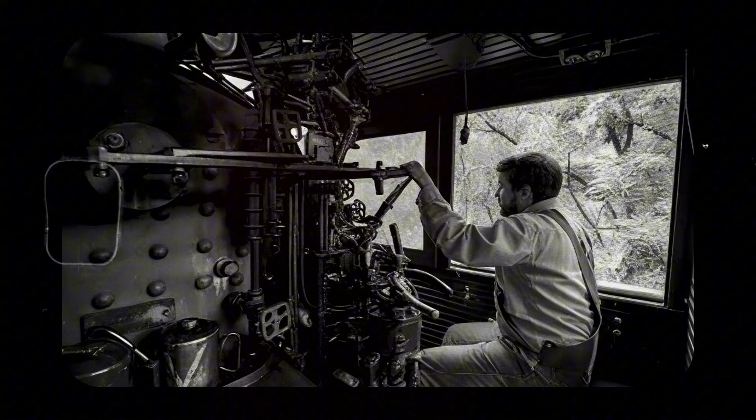Running through tunnels in the 1850s meant holding your breath and hoping for the best. Locomotives belched massive clouds of coal smoke and carbon monoxide directly into confined spaces with zero ventilation. Crews had no masks, no breathing apparatus, nothing between their lungs and the toxic exhaust billowing from their own smokestack. The physics were brutally simple: a locomotive entering a tunnel pushed its own smoke ahead like a piston, then sat in that poisonous cloud for however long the tunnel stretched. Engineers and firemen would emerge gasping, eyes streaming, sometimes unconscious at the controls.

Tunnel workers clearing debris fared even worse. Maintenance crews routinely collapsed from the fumes while repairing tracks underground. The Baltimore and Ohio's tunnels became particularly notorious. Crews called certain runs suicide shifts because the smoke concentration could render a man unconscious in minutes.

Some railroads experimented with timing train passages to allow smoke clearance between runs. Most didn't bother. The solution seemed obvious: improve ventilation or modify exhaust routing, but that cost money. So engineers kept running blind into smoke-filled darkness, gambling they'd reach the other side before the carbon monoxide won.

Locomotives in the 1850s routinely barreled through pitch darkness with lighting that wouldn't illuminate a decent-sized closet. Early headlights were little more than oil lanterns mounted on the smokebox, casting perhaps 50 feet of dim yellow glow. At 30 miles per hour, that gave engineers roughly 1 second of warning before hitting whatever lurked on the tracks ahead. Stopping distances far exceeded visibility distances. Engineers couldn't see obstacles until they were already committed to colliding with them.

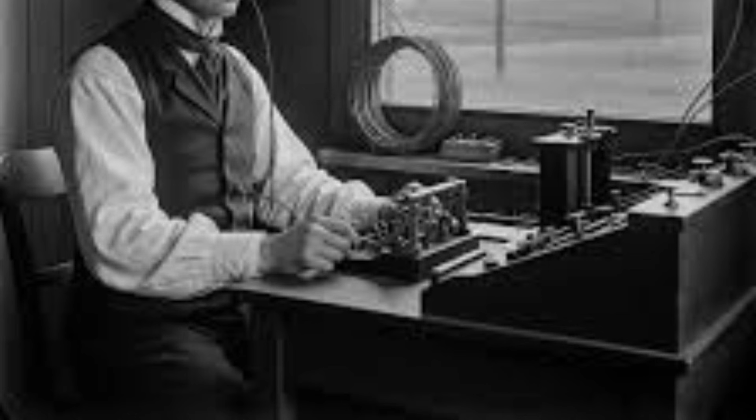Station operators worked long shifts in noisy environments, copying messages under pressure while multiple trains waited. Penmanship varied wildly. An engineer squinting at scrawled instructions in poor lighting might misread a crucial detail: the wrong track number, an incorrect time, a misspelled station name. The system had no verification protocols. Once an order left the dispatcher's key, it traveled through multiple human hands with no confirmation that the final version matched the original intent.

A famous collision near Burlington in 1855 killed 21 people when conflicting orders sent 2 trains toward each other on the same track. Investigators found the telegraph message had been transcribed correctly, but one operator interpreted the timing differently than intended. The technology that promised safety had simply relocated the danger.

Engineers and firemen in the 1850s worked until they couldn't physically continue, then worked some more. 18-hour shifts were common. 24-hour marathons weren't unusual during busy periods. Railroads treated crew fatigue as a personal failing rather than a systemic hazard. The consequences were predictable.

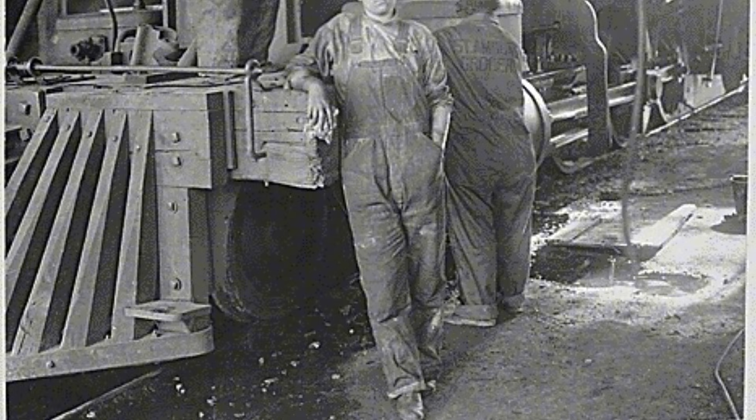Exhausted engineers fell asleep at the throttle, missing signals and station stops. Firemen nodded off while monitoring water levels, allowing boilers to run dangerously low. Brakemen stumbling across car roofs in the dark made fatal missteps because their reflexes had abandoned them hours earlier.

Management's attitude was brutally pragmatic. Training replacement crews cost money. Running existing crews into the ground cost nothing on paper. When accidents occurred, companies blamed individual negligence rather than examining scheduling practices.

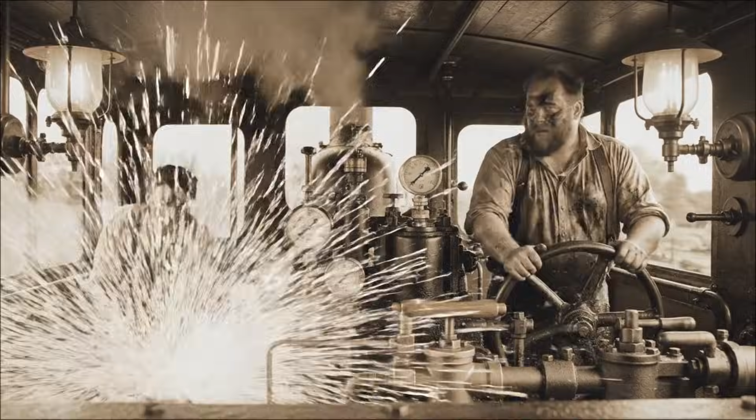Some engineers reported working 72 hours straight during peak traffic, sustained by coffee and desperation. Medical understanding of fatigue's effects on judgment barely existed. The concept that sleep deprivation could impair performance as severely as intoxication wouldn't gain acceptance for another century. Meanwhile, engineers operated complex machinery while barely conscious.

Every railroad in the 1850s invented its own rules, its own signals, and its own procedures.

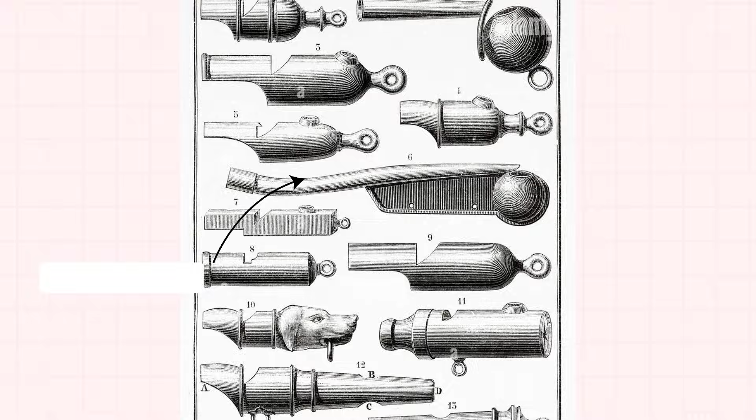An engineer who worked perfectly safely on one line became a liability the moment he crossed onto another railroad's tracks. Hand signals meant different things to different companies. Whistle codes varied wildly—what indicated stop on the Pennsylvania might mean proceed with caution on the Baltimore and Ohio.

This chaos extended to basic operations. Some railroads gave eastbound trains priority, others favored westbound. Some used red flags for danger, others used white.

Even within single companies, rules changed between divisions. A conductor who knew the Northern Division's procedures might find himself completely disoriented on the Southern Division. The resulting confusion caused countless collisions and derailments. Experienced railroaders carried mental libraries of contradictory rules, trying to remember which procedures applied to which stretch of track.

Industry standardization wouldn't arrive until decades later, driven by accumulated disasters that finally convinced competing railroads that dead passengers were bad for everyone's business. Railroad expansion in the 1850s outpaced engineering wisdom.

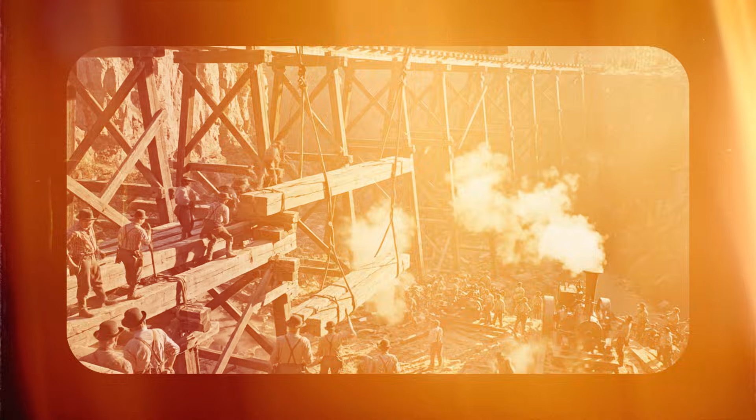When tracks needed to cross valleys, rivers, or ravines, builders threw up wooden trestle bridges with terrifying speed. These structures used timber framing that could be erected in weeks rather than the months required for stone or iron construction. The cost savings were substantial.

So were the risks. Wooden trestles rotted from within, their decay invisible until catastrophic failure. Heavy rains swelled rivers that undermined foundations. Fire from locomotive sparks could destroy an entire bridge in minutes. Maintenance inspection was haphazard at best. Many railroads considered bridges sound until they actually collapsed.

But structural collapses were equally common. Timber that looked solid might be hollowed by rot or weakened by insect damage. Engineers crossing trestles learned to listen for unusual sounds, creaking or cracking that might signal imminent collapse. They also learned to accelerate, reasoning that getting across quickly reduced exposure time to whatever might happen beneath the wheels.

In the 1850s, trains followed each other with nothing but faith and scheduling between them. The block signal system, which divided tracks into protected sections, existed in theory but rarely in practice. Most American railroads relied entirely on timetables, assuming trains would maintain their schedules with clockwork precision.

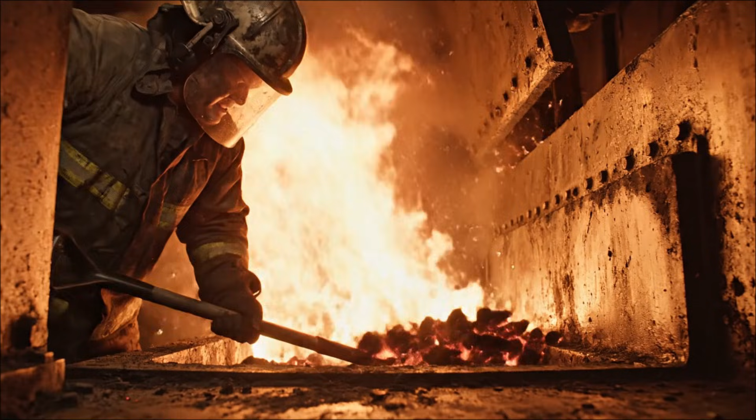These blowbacks happened without warning. One moment a fireman would be reaching toward the firebox with his shovel. The next, he'd be engulfed in flames and steam, hot enough to cook flesh instantly. Survivors described the sensation as being hit by an invisible wall of fire.

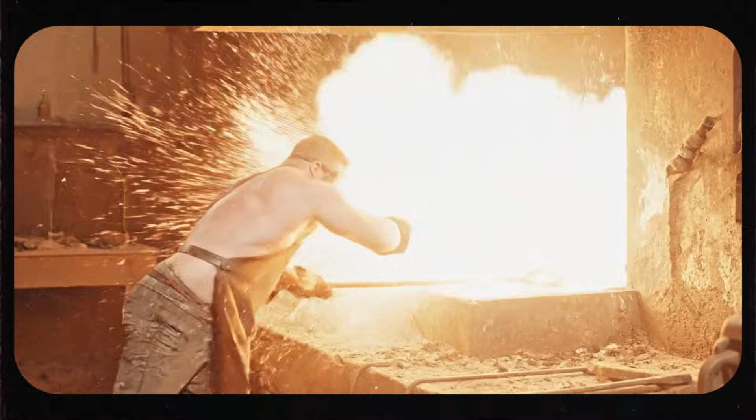The cab offered no protection. Early locomotives had minimal shielding between crew and machinery. Firemen worked inches from the firebox opening, fully exposed to whatever came out. Burns were an occupational expectation rather than an exception.

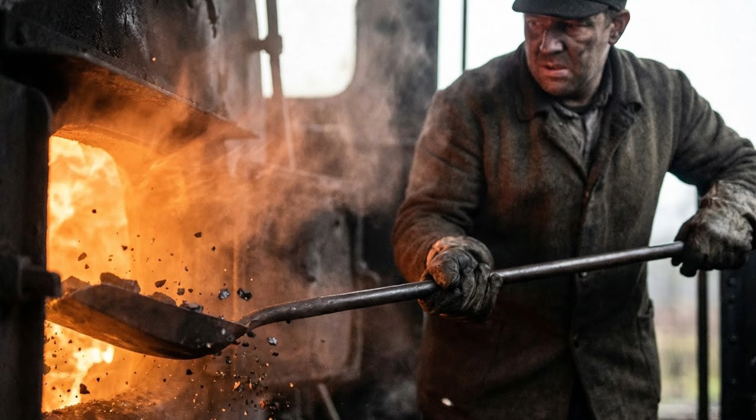Experienced firemen developed techniques to minimize exposure, angling their bodies, using long-handled shovels, timing their actions to the locomotive's rhythm. None of this was foolproof. The fundamental design placed human beings directly in the path of potential thermal eruptions, and nobody seriously considered redesigning it.

Locomotive cabs in the 1850s offered crews about as much protection as a covered wagon. Many early designs had no enclosed cab at all, just a small roof over the engineer and fireman's positions. Side walls, when they existed, were often partial, leaving crews exposed to wind, rain, snow, and flying debris.

Operating in winter meant enduring temperatures that could freeze exposed skin in minutes. Engineers and firemen bundled in layers of wool, their hands barely functional inside heavy gloves that made operating controls difficult. Frostbite was routine. Hypothermia was a genuine risk on long runs through mountain passes.

Summer brought different torments. Crews roasted between the firebox heat behind them and direct sun above. Cinders and hot ash from the smokestack rained down constantly. Burns from flying embers were so common that railroad crews developed distinctive scarring patterns.

The cab's exposure also meant vulnerability to trackside hazards. Tree branches, low bridges, and debris struck crews with regularity. Engineers learned to duck instinctively at certain locations, knowledge passed down through painful experience. Full cab enclosures would come eventually, but the human crew remained the least protected component.

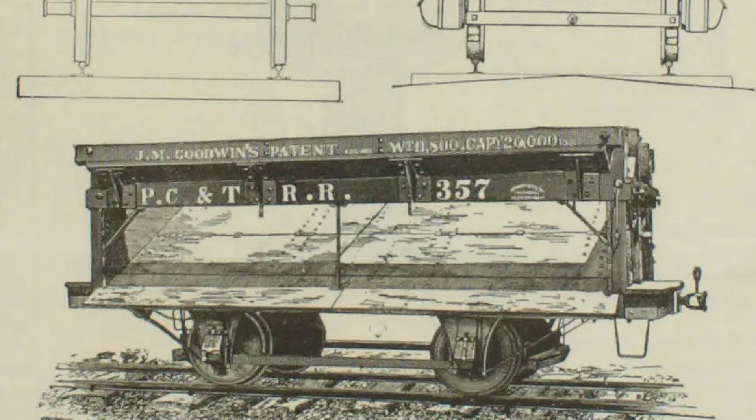Wooden cars were cheap to build. Metal alternatives existed but cost more. Railroads calculated that the occasional fire death was an acceptable price for lower construction expenses. Insurance would cover lawsuits. Passengers sat in elaborately decorated fire traps, their ornate woodwork soaked in varnish that accelerated flames beautifully. Heating alternatives were proposed, but rarely implemented.

The Angola horror of 1867 would eventually force change, when 49 people burned alive after a derailment sent stove coals throughout the wreckage. But throughout the 1850s, the danger remained theoretical enough for railroads to ignore.

Engineers knew their passengers rode in kindling boxes. They also knew that expressing such concerns publicly would cost them their jobs. The business of railroading prioritized economy over safety.

Iron rails in the 1850s had a fatal flaw that winter exposed with brutal regularity. The metal became brittle in cold weather, snapping under the weight of passing locomotives with no warning whatsoever. An engineer would be running along perfectly sound track when suddenly his wheels would drop into a gap where moments earlier solid rail had existed.

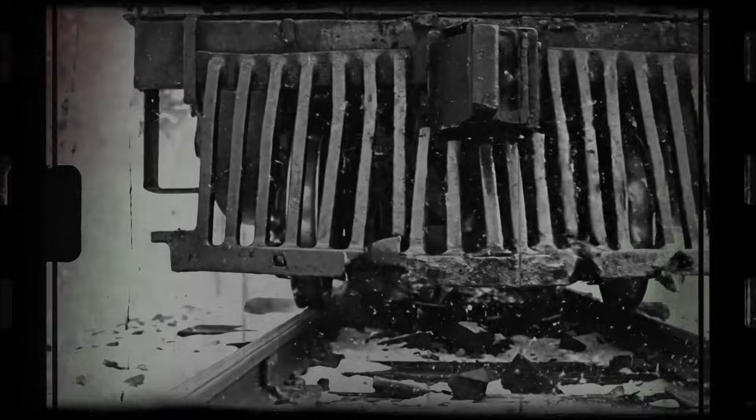Temperature swings made the problem considerably worse. Rails contracted in freezing weather, opening dangerous gaps at joints. The same rails that seemed perfectly secure on a mild afternoon might fracture catastrophically on a frigid morning. Engineers learned to dread the sharp crack of breaking rail, a sound that meant instant disaster.

There was no time to react, no chance to stop. By the time you heard the snap, you were already derailing.

The solution was steel rail, which resisted cold weather brittleness far better than iron. But steel cost significantly more to manufacture, and most railroads refused to invest until the accident toll became impossible to ignore. Throughout the 1850s, trains continued running on iron rails that might shatter at any moment, their engineers gambling that this particular cold morning wouldn't be the one where the metal gave way.

Most American railroads in the 1850s operated on single track, with trains running both directions on the same rails. The system depended entirely on scheduling. Eastbound and westbound trains were supposed to meet at designated passing sidings, where one would wait while the other proceeded. When the system worked, it worked elegantly. When it failed, trains met head-on at combined speeds approaching 60 miles per hour.

The failures happened constantly. A delayed train might miss its scheduled meet. A conductor might misread his orders. A station operator might forget to display the proper signals.

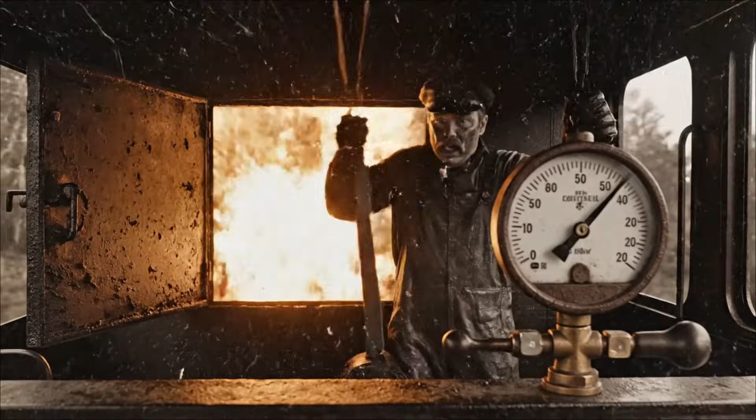Engineers learned to watch for telltale smoke ahead, the only warning that another train occupied their track. Even then, stopping was usually impossible. The physics of momentum guaranteed that by the time you saw the other locomotive, you were already committed to collision.

Some engineers survived by jumping clear at the last possible moment. Many didn't have time. Head-on collisions became so common that railroad men developed a grim fatalism about the odds.

Brakemen in the 1850s earned their wages walking across the roofs of moving freight cars. Before air brakes existed, stopping a train required manually turning brake wheels on individual cars. When the engineer whistled for brakes, brakemen scrambled up ladders and ran across car roofs, spinning wheels as they went.

The job was dangerous in perfect conditions, and suicidal in anything else. Rain made rooftops slick as ice. Snow obscured the gaps between cars. Darkness turned the journey into pure guesswork. Wind could knock a man off balance at the worst possible moment. Tunnels and low bridges added another dimension of terror.

A brakeman focused on his brake wheel might not notice the overhead clearance approaching until it was too late. Railroad veterans spoke of colleagues who simply vanished during tunnel passages, swept off by structures they never saw coming. The mortality rate among brakemen was absolutely staggering. Some estimates suggest that 1 in 4 brakemen would die or be seriously maimed during their railroad career.

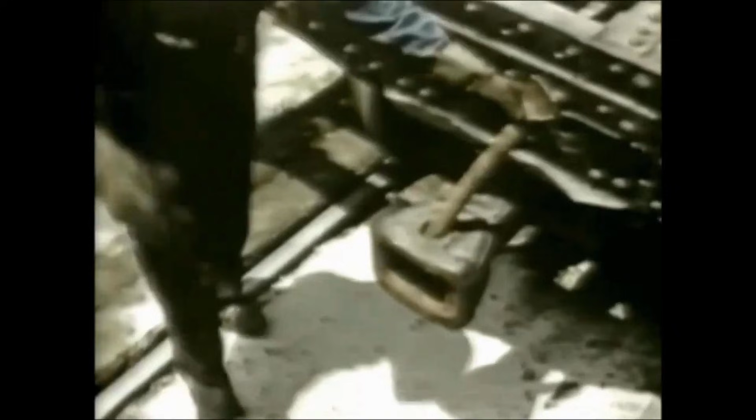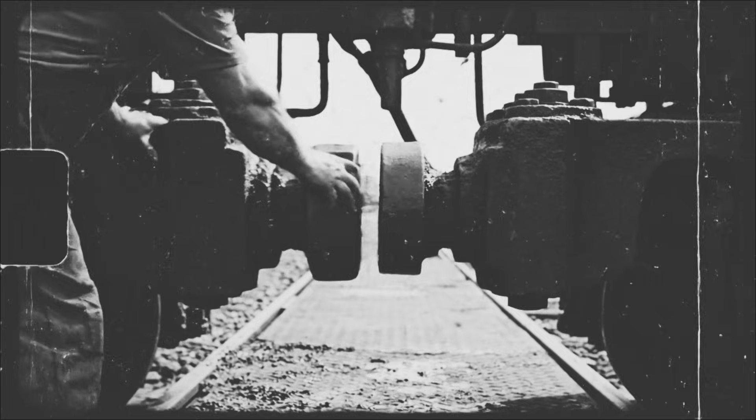The job attracted young men who needed money badly enough to accept those terrible odds, and it killed them with mechanical efficiency. Coupling railroad cars in the 1850s required a man to stand between two moving vehicles and guide a heavy iron link into a socket, then drop a pin to secure it. The timing had to be perfect. The cars approached each other at walking speed, their massive weight building unstoppable momentum. The coupler had seconds to position the link, drop the pin, and get clear before the gap closed. Get it wrong, and thousands of pounds of rolling iron would crush whatever stood between the couplers.

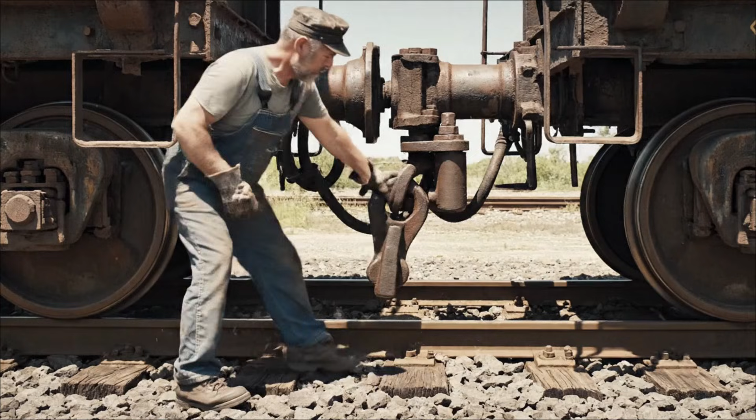The injuries were characteristic and horrific: crushed hands, severed fingers, mangled arms, death from being caught between cars that didn't stop when they should have. Experienced couplers developed techniques to minimize risk, standing sideways, using their bodies as wedges, timing their movements precisely to each car's momentum. None of this made the job safe. It just made survival slightly more probable.

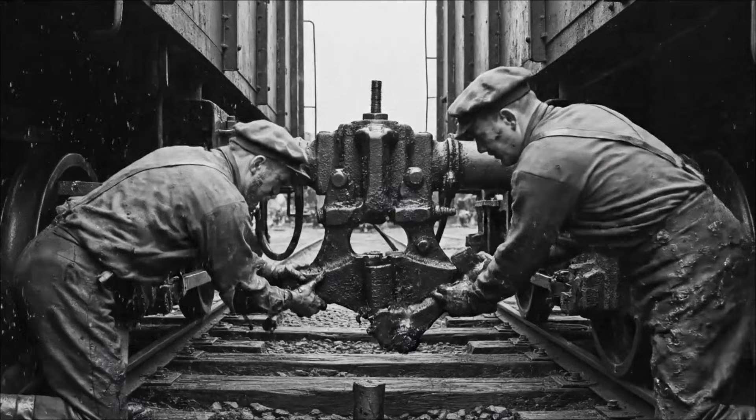Railroads knew the link and pin system was killing their workers regularly. Safer automatic couplers existed by the 1870s, but conversion cost money, and brakemen were cheap and replaceable.

Building railroads in the 1850s meant choosing a track gauge, and everyone chose differently. The Erie Railroad used 6 feet between rails. The Pennsylvania used 4 feet 8.5 inches. Southern railroads often used 5 feet. Some lines used gauges that existed nowhere else.

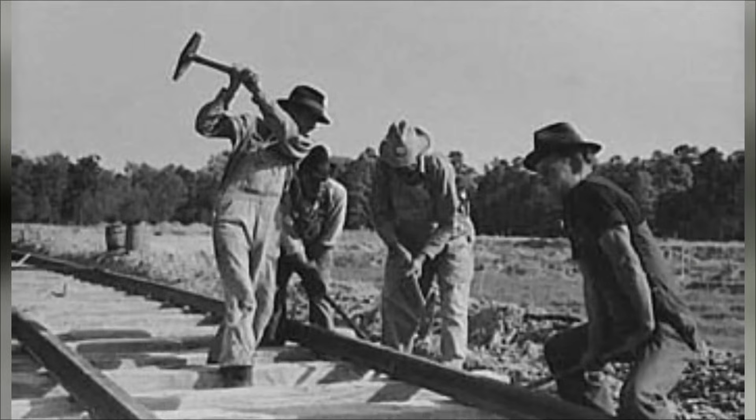The result was chaos at every junction where different railroads met. Freight couldn't simply roll from one line to another. Everything had to be unloaded, transferred to different cars, and reloaded. Passengers walked between trains. Goods sat in warehouses waiting for transshipment. Through traffic was essentially impossible.

The inefficiency was staggering, but the incompatibility also created safety hazards. When tracks of different gauges converged, the resulting track geometry confused even experienced engineers.

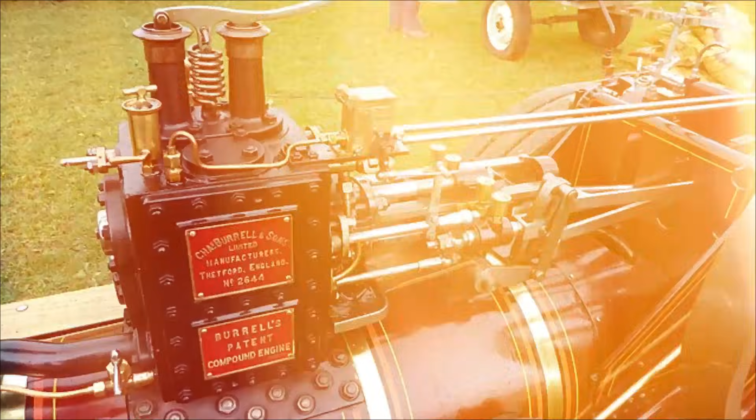The safety valve was supposed to be the last line of defense against boiler explosion. When pressure exceeded safe limits, the valve would open automatically, releasing steam and preventing catastrophic disaster. The design was elegant and simple. The implementation was sabotaged constantly by the very crews it was meant to protect.

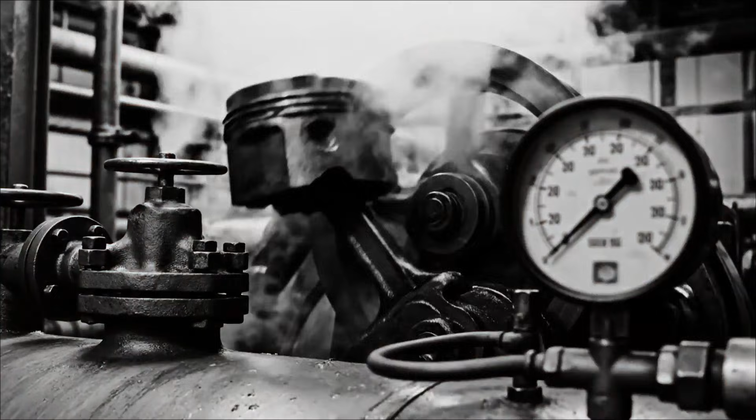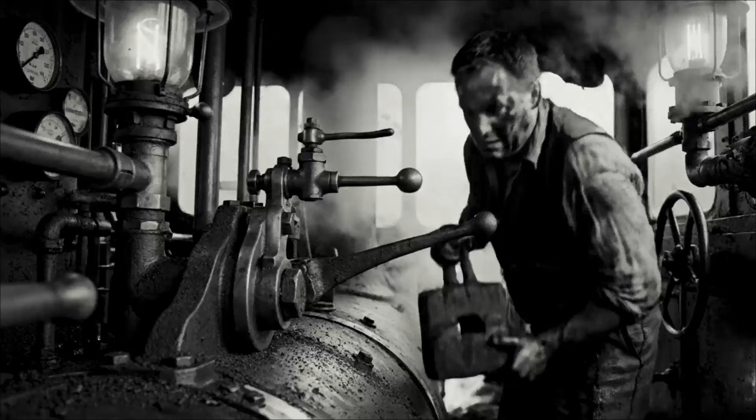Engineers and firemen hated safety valves intensely. Every pound of steam escaping through the valve was pressure that couldn't drive the pistons. A locomotive with a properly functioning safety valve was a locomotive that couldn't achieve maximum power. So crews tampered with them relentlessly.

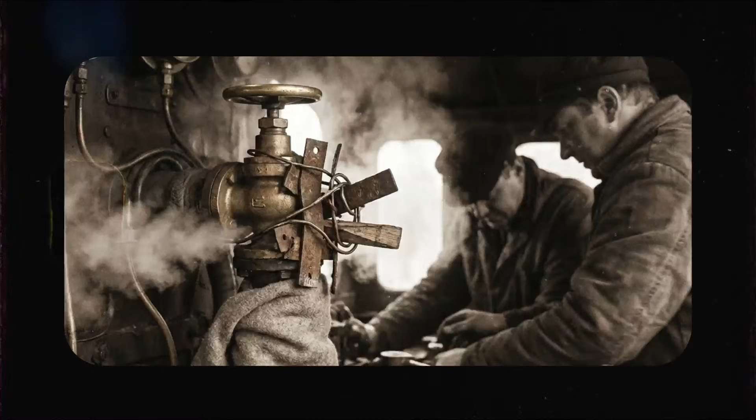They weighted the valves with extra metal. They tightened springs beyond specification. They jammed the mechanisms so valves couldn't open at all. Management often encouraged this behavior indirectly, rewarding engineers who made faster runs without asking how they achieved that extra speed.

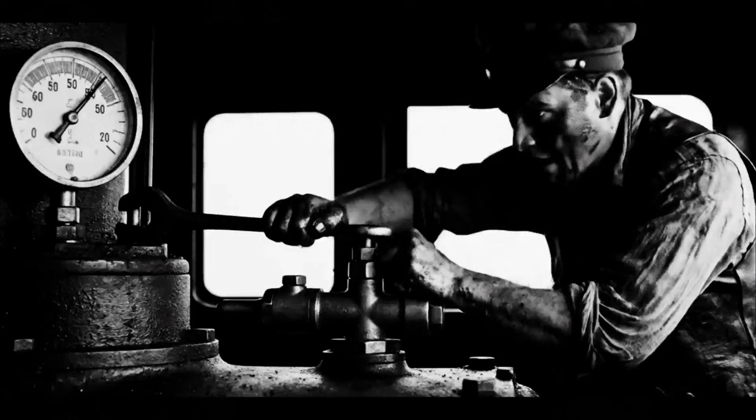The first recorded locomotive boiler explosion in America happened in 1831, when a fireman, annoyed by the hissing of the safety valve, sat on it to keep it quiet. The boiler exploded moments later. Throughout the 1850s, valve tampering remained common practice.

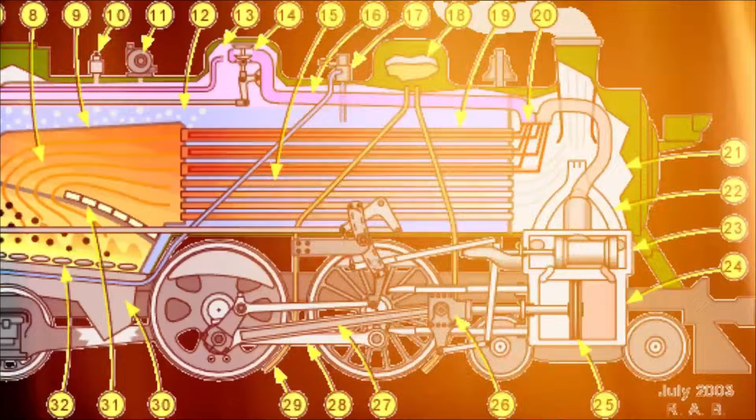The crown sheet was the metal plate forming the top of a locomotive's firebox, the barrier between water in the boiler and fire below. As long as water covered the crown sheet, it stayed cool enough to maintain structural integrity. Let the water level drop, and the exposed metal would overheat rapidly, losing strength until it couldn't contain the immense pressure above. The failure was catastrophic and unsurvivable.

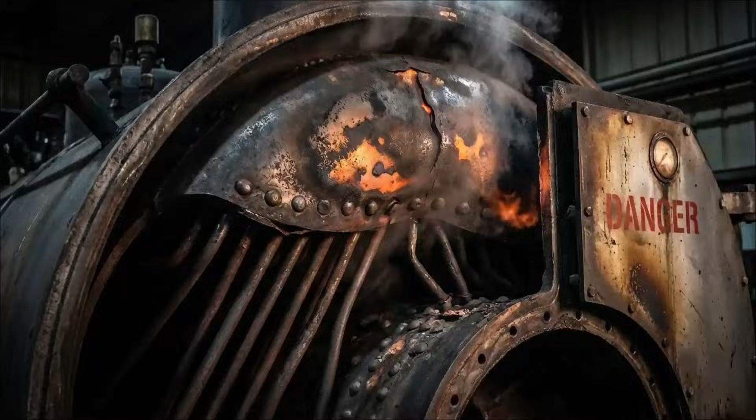Superheated steam would blast downward through the ruptured crown sheet into the firebox, then explode outward through the cab. Crews caught in a crown sheet failure were essentially cooked alive by steam and scalding water. The violence of the release often hurled bodies and locomotive components hundreds of feet from the track.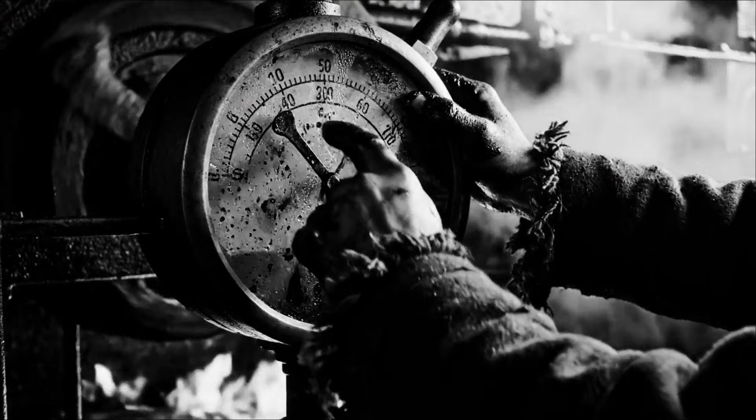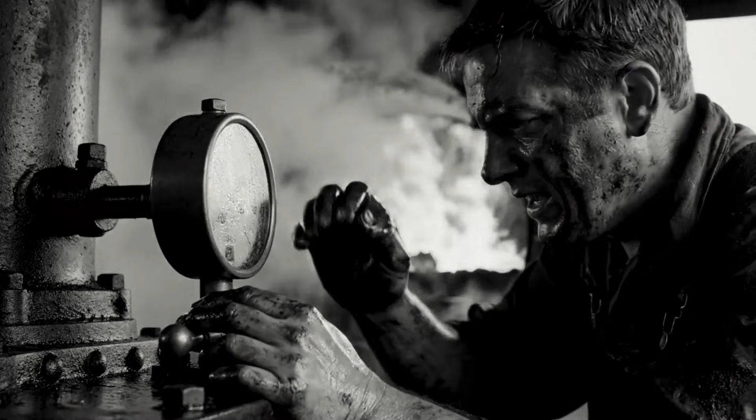Preventing crown sheet failures required constant attention to water levels. But water gauges were crude, often inaccurate, and difficult to read in the dim, vibrating cab. Climbing grades would shift water toward the rear of the boiler, exposing the front of the crown sheet even when gauges showed adequate levels. Exhausted firemen might misjudge their readings. Distracted engineers might not notice the danger until it was too late.

Before telegraph dispatching became widespread, American railroads operated on nothing but printed timetables and faith. Each train had scheduled times for departing stations, arriving at junctions, and meeting opposing traffic at designated sidings. The system assumed every train would run exactly on schedule, every crew would follow their orders precisely, and nothing unexpected would ever happen. Reality was considerably messier than any timetable could accommodate.

Locomotives broke down, weather delayed departures, crews misread their schedules. A train running late might find itself on a collision course with opposing traffic that expected clear track. There was no way to communicate changes once a train left a station.

An engineer running behind schedule had to guess whether opposing trains were waiting at sidings or barreling toward him on the main line. Some railroads gave superior trains absolute priority, forcing inferior trains to wait indefinitely at sidings until the superior train passed. This created cascading delays that rippled through entire systems. One miscalculation could send two trains into the same stretch of single track with no warning.

Nothing in 1850s railroading killed with such sudden violence as a boiler explosion. One moment, a locomotive would be running normally. The next, the boiler would rupture with the force of a bomb, hurling iron shrapnel in every direction, launching the locomotive's shell like a cannon projectile, and scalding everything within reach with superheated steam.

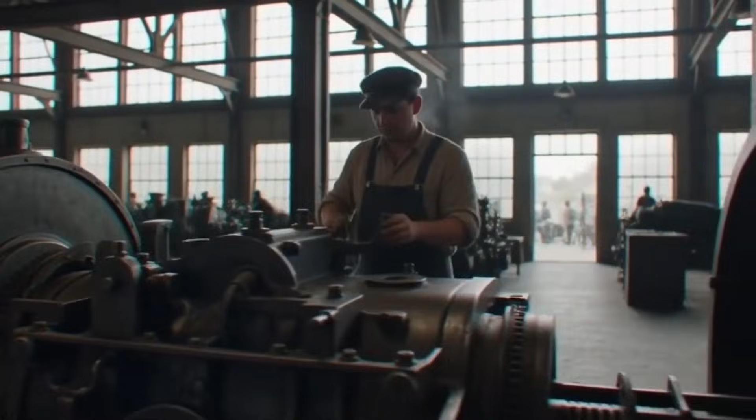Engineers and designers constantly pushed boundaries. Steam would spin a turbine, then drive an electrical generator, and that would power traction motors, for greater efficiency and increased power. But not every experiment succeeded.

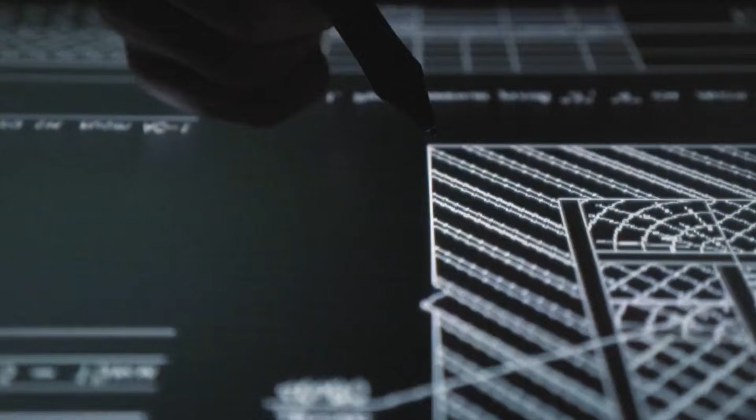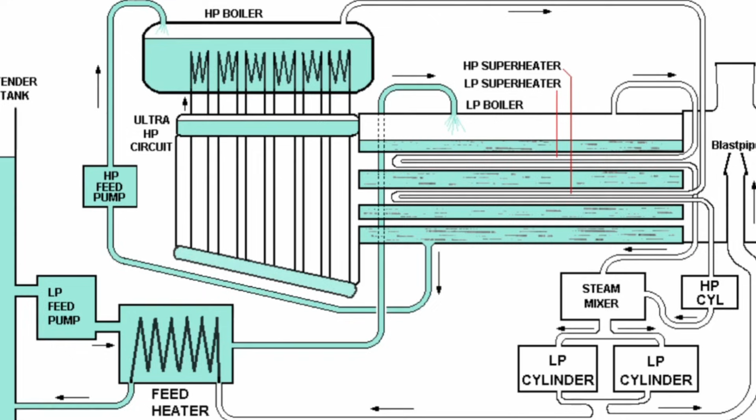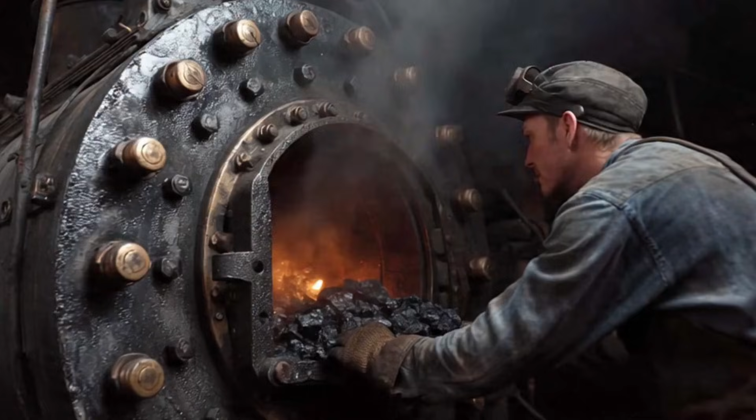The rebuilt machine limped through a handful of tests before being abandoned entirely due to persistent mechanical failures that made it utterly useless for regular service.

Engineers removed the reliable piston engine and installed a steam turbine in its place, leaving everything else completely unchanged. The locomotive still looked like a standard 2-6-2 wheel arrangement, but now it had turbine gearing where pistons once lived. The results were catastrophic. Performance plummeted to levels well below the original piston-driven locomotive.

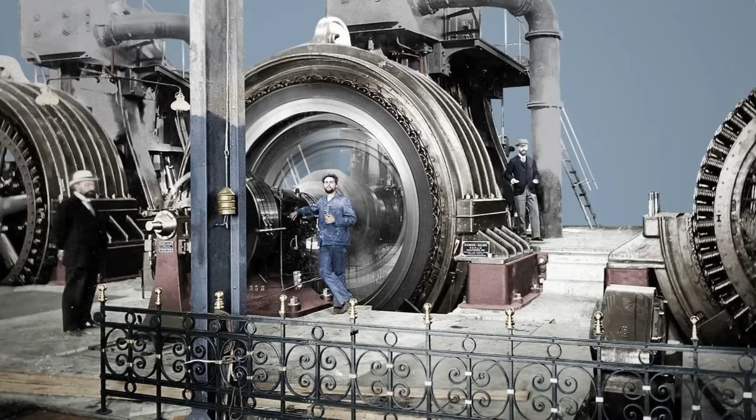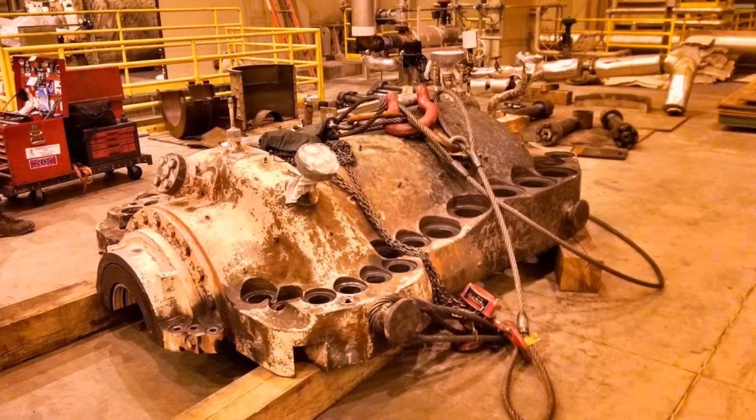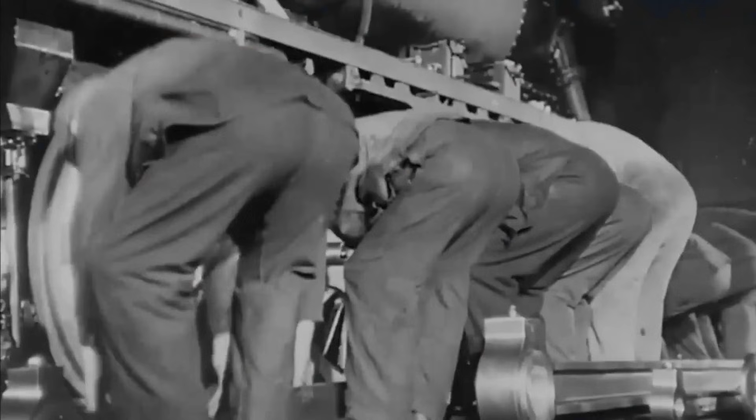They simply refitted the locomotive with a conventional piston engine in 1936 and pretended the whole turbine episode never happened. Italian engineers did not bother rebuilding the experiment. The failed conversion stood as proof that bolting new technology onto old designs rarely ends well.

Number 6. The locomotive was later rebuilt with a conventional boiler and renamed. This incident shocked the railway industry and raised serious questions about the viability of ultra-high-pressure steam technology.

Such pressures were unacceptable. The materials and engineering knowledge of the time were simply insufficient to safely operate boilers at these pressures. Fury was withdrawn from service immediately.

The fireman worked alone on a platform at the rear, completely exposed to weather and separated from the engineer by an entire roaring boiler. The result was a machine that looked unlike any steam locomotive before it.

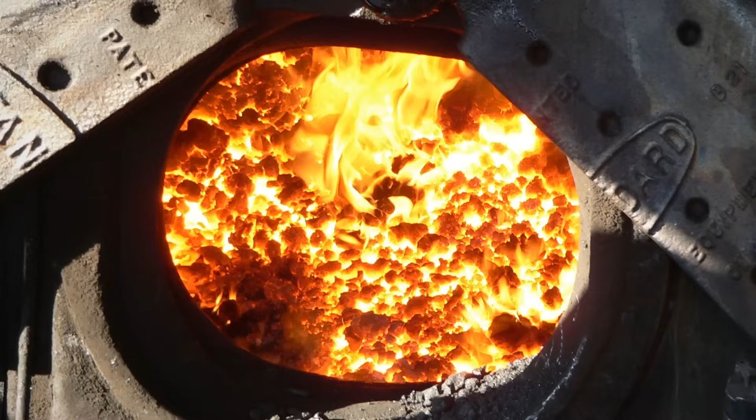Engineers perched directly above the whirling side rods and main rods, with nothing but thin cab walls between them and disaster. This design offered numerous advantages, including better working conditions for crews, reduced turnaround times, and improved visibility.

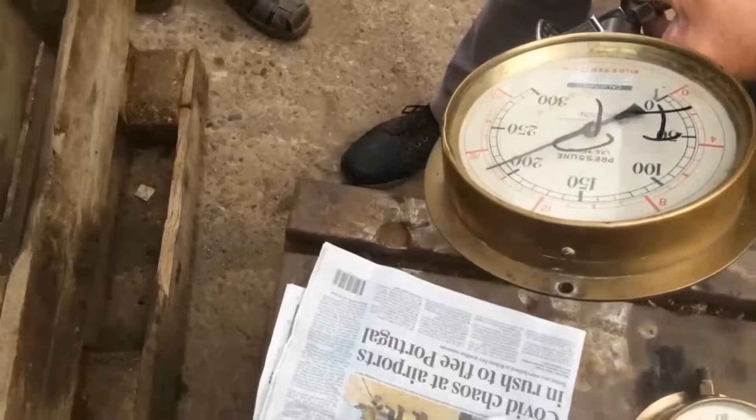Pennsylvania Railroad engineers quietly shelved the proposal, recognizing that ambition had outpaced physics. The Leader featured a completely enclosed design with driving cabs at both ends, eliminating the need to turn the locomotive at the end of each journey.

Water from the condensing system followed the dust, turning coal residue into an abrasive slurry that destroyed electrical components. The locomotives could not complete a single journey from Washington to Cincinnati without suffering some kind of failure.

After spending millions on development, the C&O operated their M1s for barely a year before giving up. Number 5. The Kitson-Still locomotive.

In the 1920s, engineers were exploring ways to combine the best features of steam and internal combustion engines. The complex chain-driven mechanism that transmitted power to the wheels proved troublesome, requiring frequent adjustment and repair. Reliability was poor, with the locomotive spending far more time under repair than in service.

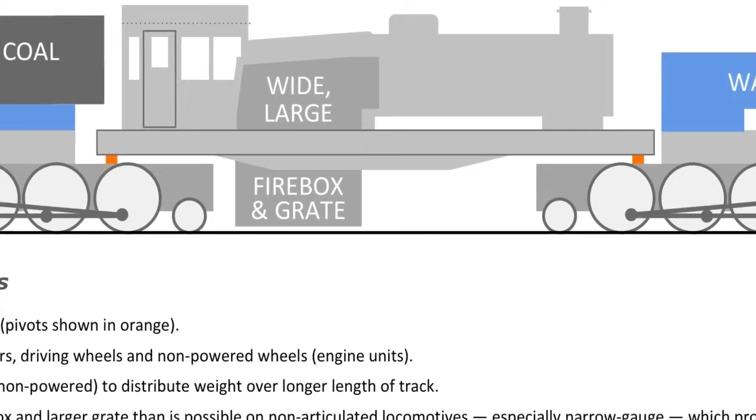The proposed V1 class would have featured 4 complete engine units, essentially quadrupling the triplex concept that had already proven problematic on the Erie and Virginian railroads. Internal documents show engineers planning for over 200,000 lb of tractive effort.

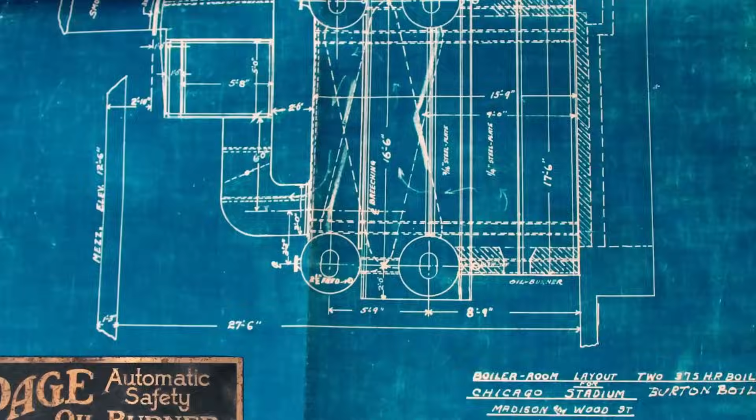The reality proved humiliating. This massive machine could barely sustain 5 miles per hour. The boiler, despite being larger than anything previously attempted, simply could not generate enough steam for 6 enormous cylinders operating simultaneously. Crews watched pressure gauges drop towards zero within moments of opening the throttle.

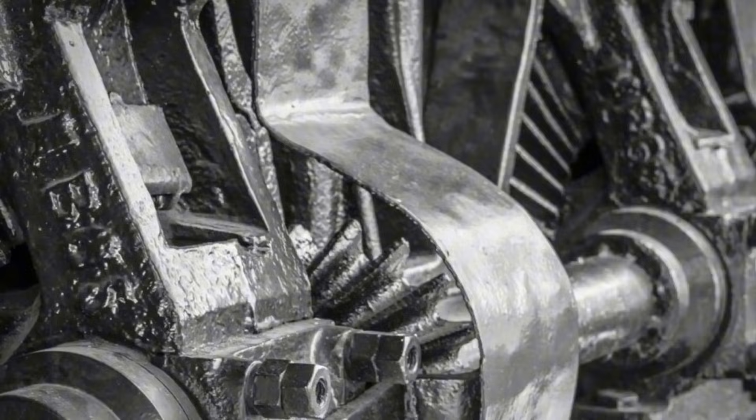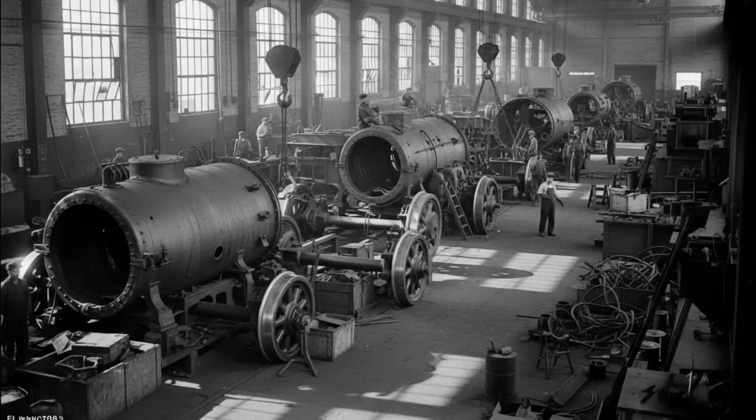After less than 5 years of frustrating service, the Virginian returned the locomotive to Baldwin, who cut it apart and rebuilt it as 2 separate, conventional locomotives.

Baldwin built the first triplex for the Erie Railroad in 1914, naming it the Matt H. Shay, after a beloved company engineer.

The reality proved that some problems cannot be solved by simply adding more cylinders. The Matt H. Shay generated 160,000 pounds of tractive effort, more than any steam locomotive before or since. This massive force immediately created new problems. Couplers snapped, car frames twisted, drawbars pulled out of freight cars like corks from bottles.

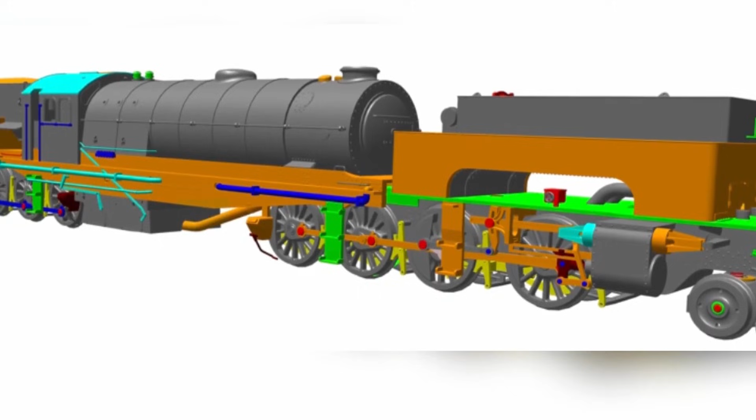The locomotive, delivered in 1925, was a massive articulated machine with separate engine units at each end and the boiler suspended between them. The railway industry concluded that specialized locomotives, whether pure steam or pure diesel, were more practical than attempting to combine both technologies in a single machine.

Number 4: the Beyer-Garratt oil burning experiment for London transport in the 1920s.

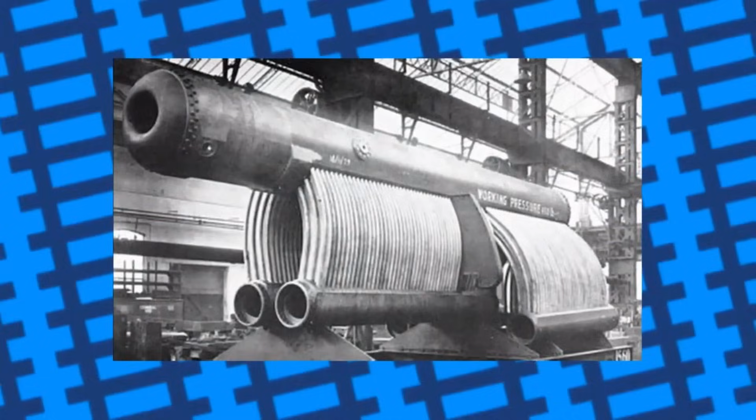But the locomotive's problems proved impossible to hide. Nigel Gresley designed it with a water tube boiler operating at 450 pounds per square inch, more than double the pressure of conventional locomotives. But the original oil-burning configuration never ran again. This experience demonstrated that technological solutions must be matched carefully to operational requirements, and that complexity doesn't always equal improvement.

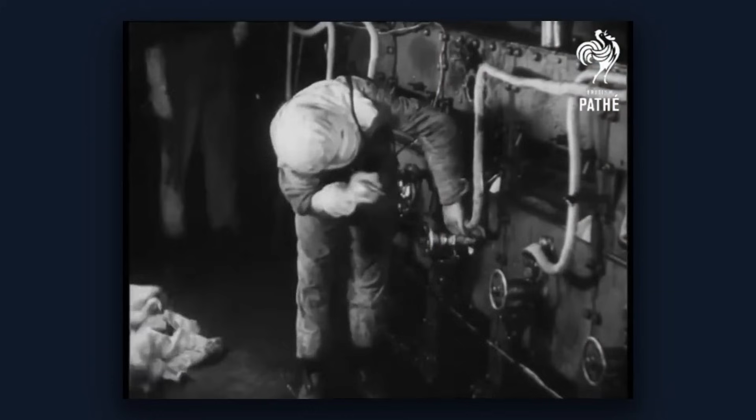Marine engineers had proven high-pressure water tube boilers worked brilliantly in ships, but railway operation proved far less forgiving. Steaming proved so poor that the locomotive could not match the performance of standard Gresley Pacifics despite its advanced technology. The compound expansion system required constant adjustment.

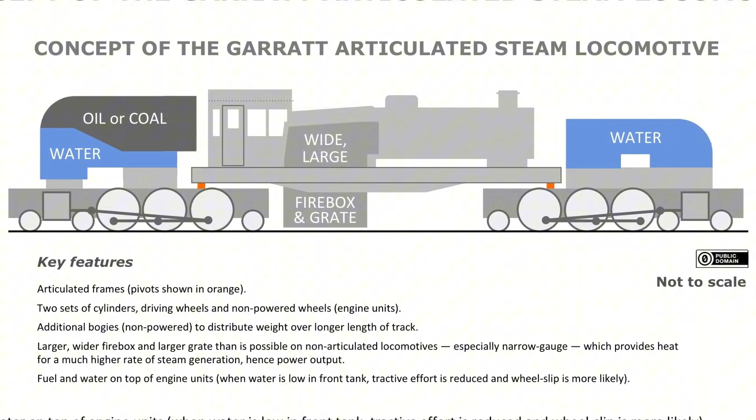The gas turbine engine could produce far more horsepower than contemporary diesel locomotives. The burners were temperamental and difficult to adjust properly. When not perfectly tuned, they produced excessive smoke and soot, defeating the entire purpose of using oil fuel.

London's Metropolitan Railway needed powerful locomotives to haul heavy commuter trains through the increasingly congested underground sections. The railway ordered a specialized Beyer-Garratt articulated locomotive.

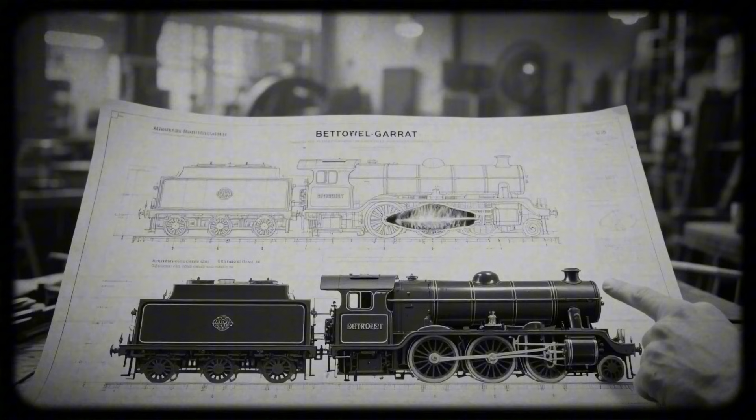Fuel consumption was the most obvious problem. The turbines burned Bunker C fuel oil, a thick, heavy residue left over from petroleum refining. While this fuel was cheap, the turbines consumed it at extraordinary rates.

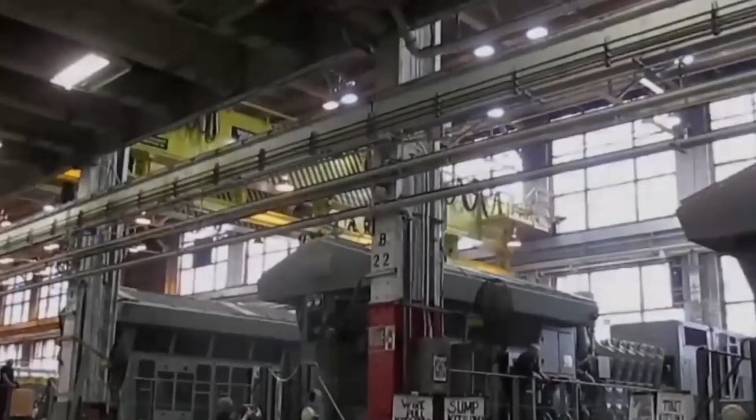After 7 frustrating years, the LNER admitted defeat and rebuilt the entire locomotive with a conventional boiler in 1936. The turbines were sensitive to fuel quality, and contamination could cause rapid deterioration of turbine blades.

Turbines require high rotational speeds to operate efficiently, and gearing that worked beautifully at highway velocities proved catastrophic at yard speeds. Union Pacific eventually developed improved turbine designs that addressed some of these issues, but the earliest experimental units were deemed beyond economical repair. But they also demonstrated the challenges of introducing radically new technology to railway operations. The locomotive was scrapped in 1952, having logged just 103,000 miles before proving turbines belong in power plants, not on rails.

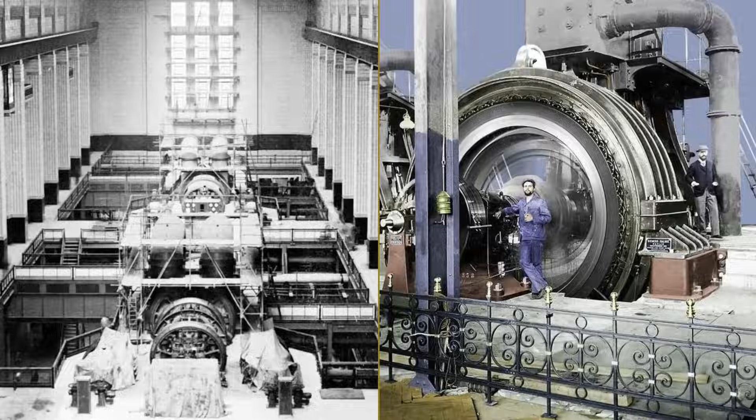Above 40 miles per hour, the turbine consumed less fuel than conventional locomotives while delivering smooth, silent power. These early turbines were designed to provide immense power for hauling freight across Union Pacific's western routes.

The Norfolk and Western Jawn Henry was supposed to prove that steam could outperform diesel at its own game. This steam turbine electric stretched 161 feet from coupler to coupler, making it the longest steam locomotive ever constructed. The boiler operated at 600 pounds per square inch, nearly double conventional pressure.

The design promised to preserve coal hauling jobs in Norfolk and Western's Appalachian Territory by proving steam could match diesel efficiency. Coal dust infiltrated the electrical equipment constantly, destroying traction motors and generators.

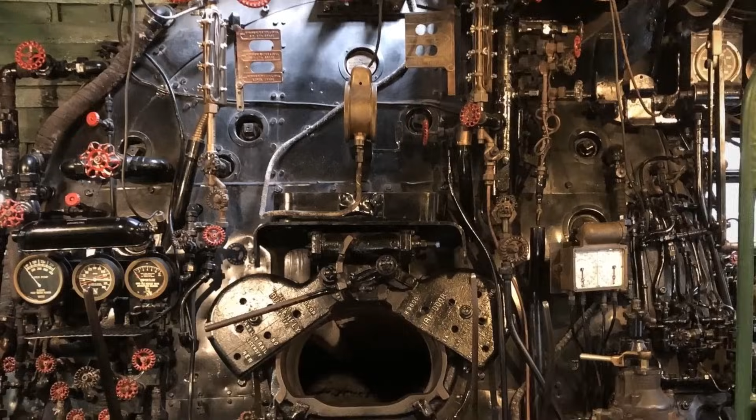The complex controls confused even experienced engineers, leading to mistakes. Performance ran 15% below the conventional Class A locomotives it was supposed to replace. Norfolk and Western scrapped it in 1958, the last desperate gasp of steam dying 4 years after birth.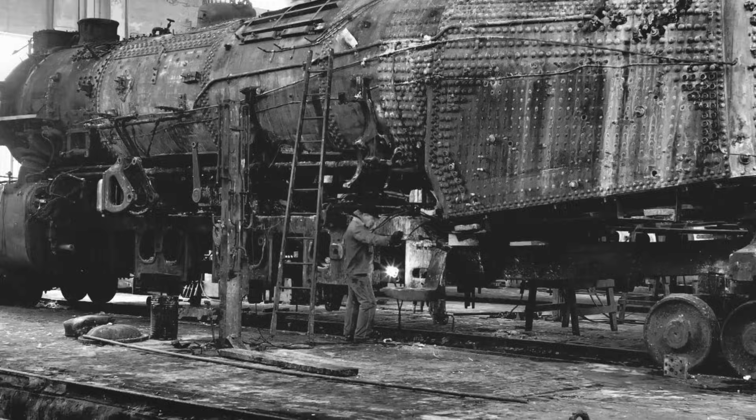But some of their more experimental units proved deeply problematic and were withdrawn after brief service. However, several design issues made some Sentinel railcars unpopular and ultimately unworkable. Articulated designs intended to increase capacity were structurally weak and suffered from cracking and frame failures. Steam leaks, engine troubles, and boiler issues kept them out of service frequently.

The locomotive's extreme length meant it could not use any turntable on the Norfolk and Western system.

The Pennsylvania Railroad's T1 duplex looked magnificent and ran like a nightmare. 52 of these streamlined 4-4-4-4 locomotives were built between 1942 and 1946, designed by Raymond Loewy to be the fastest passenger power in America. They achieved that goal, reportedly touching 140 miles per hour on test runs. The poppet valves, chosen for quick steam admission, made problems worse by delivering power in sudden bursts.

The failures of these experimental steam railcars helped accelerate the transition to diesel railcars on British branch lines.

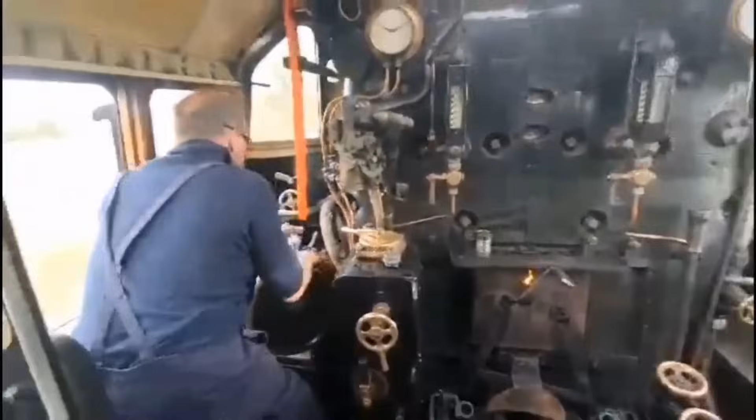In the 1950s, South African railways experimented with condenser locomotives. Crews accustomed to conventional Pacifics found themselves wrestling machines that responded to throttle inputs in unexpected ways. The vertical boiler design was compact and efficient for its size, and the high-speed engine could propel the railcar at respectable speeds. These railcars combined a small vertical boiler, a high-speed steam engine, and passenger accommodation in a single vehicle.

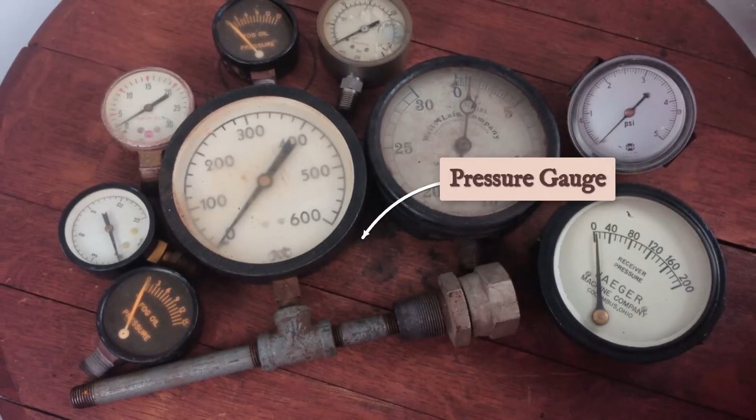The London, Midland and Scottish Railway locomotive number 6399, Fury, represented Britain's most ambitious attempt at high-pressure steam, and it ended in death. Fury operated at pressures ranging from 900 to 1,800 pounds per square inch in its ultra-high pressure circuit. The theory promised dramatic fuel savings through thermodynamic efficiency.

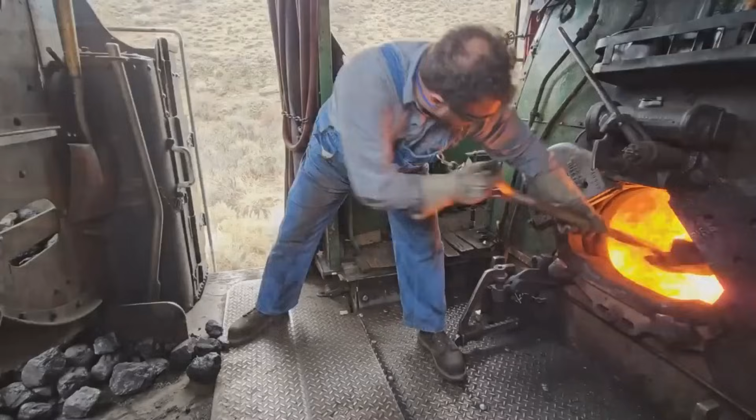During a test run from Glasgow to Carstairs, one of the ultra-high pressure tubes burst catastrophically. Scalding steam and boiling water erupted through the cab, ejecting burning coals from the firebox. Lewis Schofield, an engineer from the superheater company who was riding on the footplate to monitor performance, suffered horrific burns.

Investigators at Sheffield University examined the burst tube but never determined a definitive cause. In 1935, the railroad admitted defeat and rebuilt the locomotive with a conventional boiler. It was so secret that only one official photograph exists, and its problems explain why the railway wanted it forgotten.

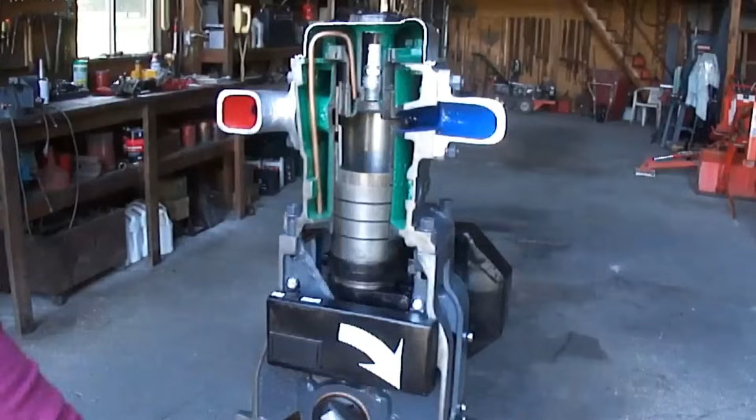This bizarre 2-6-2 wheel arrangement featured 8 uniflow cylinders arranged in 2 groups between the driving axles, all controlled by rotary sleeve valves. The bronze sleeves operating inside cast iron steam chests could not handle thermal expansion.

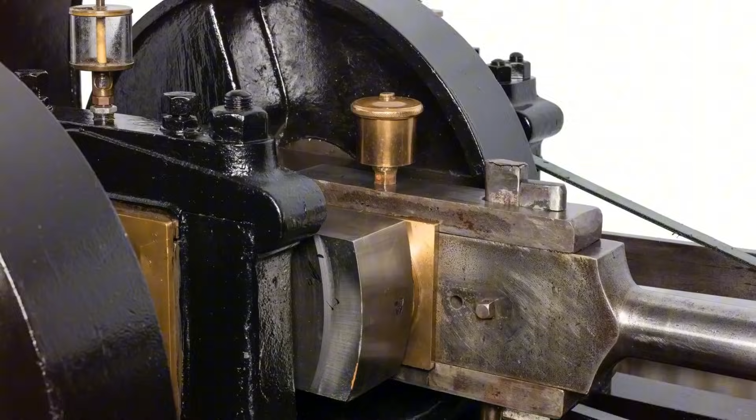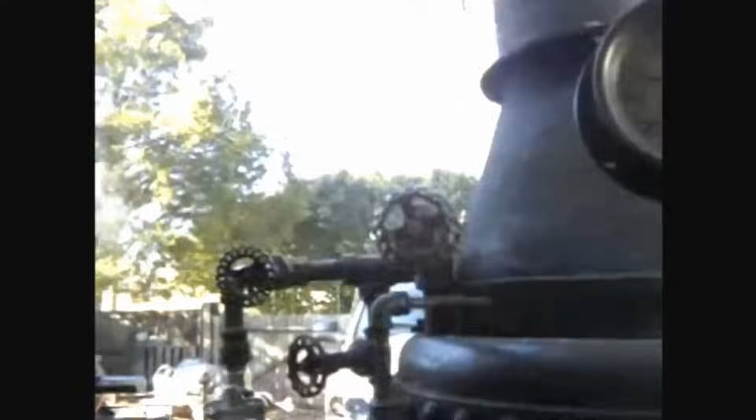As the engine heated up, different metals expanded at different rates, causing the sleeves to seize solid, stranding the locomotive on the main line for 7 hours while crews struggled to free the mechanism. The constant leakage past the 192 piston rings required for the sleeve valve system wasted steam continuously.

Fans drove air through these condensers, cooling the exhaust steam and converting it back to water. In theory, this should have allowed almost indefinite operation without taking on water, where the challenging operating environment of the semi-arid Karoo region inspired unusual locomotive designs.

This made the T1 extraordinarily prone to wheel slip, violent wheel slip that occurred without warning at any speed. Engineers reported front drivers spinning wildly, while rear drivers gripped normally, sending shudders through the locomotive.

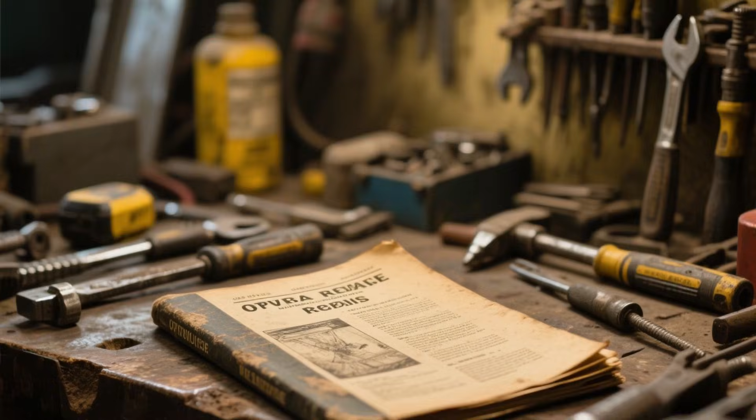Operating departments found them unreliable and difficult to maintain with standard railway facilities. The specialized knowledge required to service these unusual machines was often not available at smaller depots. The ride quality was often poor, with vibration from the engine and rough suspension making passenger travel uncomfortable.

The vertical boiler, while space efficient, was difficult to maintain and prone to steaming problems. Water capacity was limited, requiring frequent stops for refilling. Some experimental variants incorporated unusual features that proved impractical.

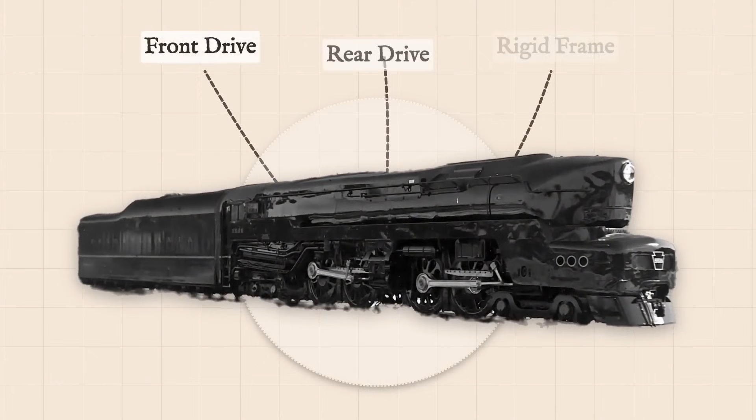But the T1s concealed a fatal flaw that made them nearly uncontrollable. The divided drive arrangement placed two sets of driving wheels on a rigid frame, each powered by its own cylinders. Instead, it demonstrated everything wrong with late-era steam technology.

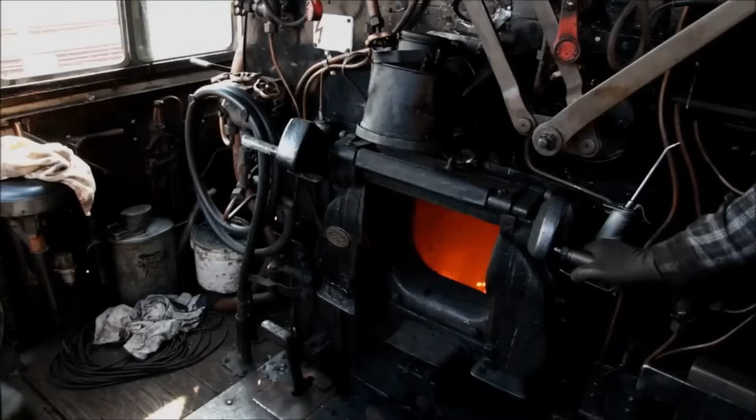The water tube boiler required specialized maintenance that most crews could not perform. Wheel slip damaged valve gear, which caused more slip.

By 1948, the Pennsylvania Railroad had begun replacing their revolutionary T1s with diesel locomotives. Every single locomotive was scrapped. None were preserved. The entire fleet was erased from existence.

Norfolk and Western's Jawn Henry earned its nickname from the legendary steel driving man who raced against a machine and won, only to die from the effort.

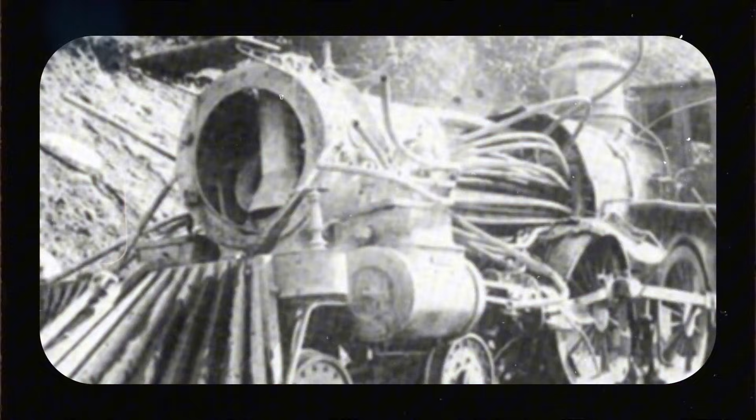Low water exposing the crown sheet, disabled safety valves that couldn't release excess pressure, poor maintenance that allowed scale buildup. Throughout the 1850s, boiler explosions occurred with horrifying regularity. Engineers knew the risk every time they climbed into the cab.

And that's all, folks. 20 dangers that steam engineers faced daily, and 20 hazards that the industry chose to ignore until the body count became impossible to deny.